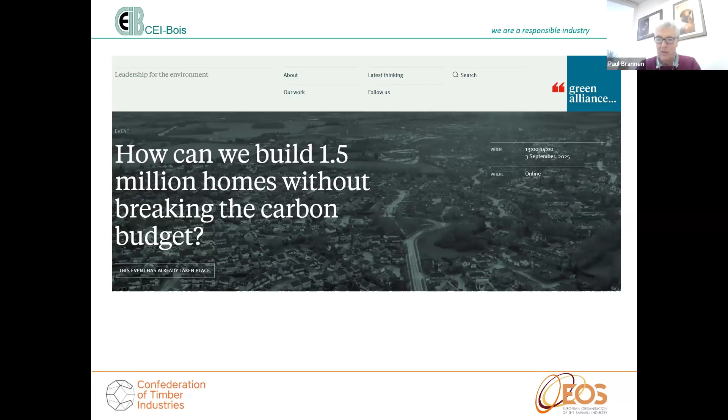We were at the Labour Party conference the other week, and it's fair to say our fears were not really mitigated from the conversations we had. We had a fringe meeting with the Labour Housing Group, and there does seem to be a disconnect at the heart of government in relation to the climate impact of building a large number of homes.

We're obviously making an argument from the point of view of the Confederation of Timber Industries, but it was very much the argument of the book: by switching to nature-based materials more as and where appropriate in construction, with timber being the leading material we have the most experience with, there are three big opportunities in relation to the climate.

There's the sequestration that trees do in the forest. There's a chapter in the book about European forestry, where the timber comes from. People will be aware that we import 80% of our timber, Sweden being the biggest single supplier. We grow very little of our own, but where the trees are growing, the carbon is being sequestered from the atmosphere, and that's step one down the road of benefit in relation to climate.

Then two big benefits come out. There's a substitution effect when you use wood instead of brick and block or concrete or steel. And there's also a storage opportunity, in that the materials we're using can store carbon.

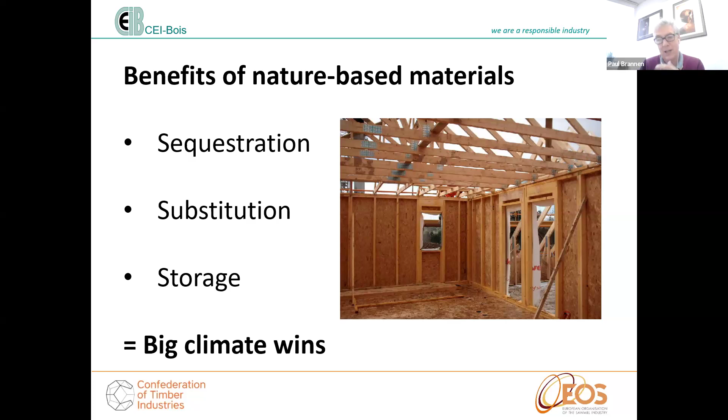So getting people to think through the substitution and the storage in relation to insulation, as well as the other materials, I think is really quite important.

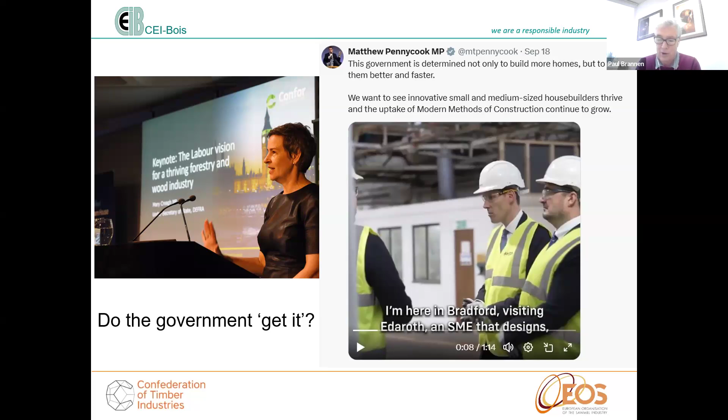As regards the government, we're fairly certain that Mary Creagh, who is the Minister for Nature and has responsibility for forestry in the UK, gets it from our various encounters with her as representatives of the timber industry. She understands. We're not so sure about Matthew Pennycook, who is the lead housing minister. Here he is on a visit just recently to a modular homes factory using steel for the frames. Could be using timber, but they're using steel. We're not sure that Matthew gets it, and part of our job is to try and get that message through.

The government did produce the Timber in Construction Roadmap back in March of this year. This began life under the previous government, so we're not entirely sure of the level of ownership under the Labour government from the previous Conservative government. But nonetheless, it was published. Mary Creagh, as the minister, launched it, and it does have the government stamp of approval for an increased use of timber in construction, and within that, an increased use of homegrown timber in construction. So that's a pretty piece of good news.

And this is what Mary Creagh says in the introduction, which is, I'm sure, maybe written for her by a civil servant, but it's got her name on it. We're fairly certain from the conversations we've had that she gets it, that using wood in construction is one way of driving down carbon emissions.

We've lost Angela Rayner, and it remains to be seen with Steve Reed coming in whether there's any particular change. But it was nice to see this in the Telegraph at the time of the launch of the document.

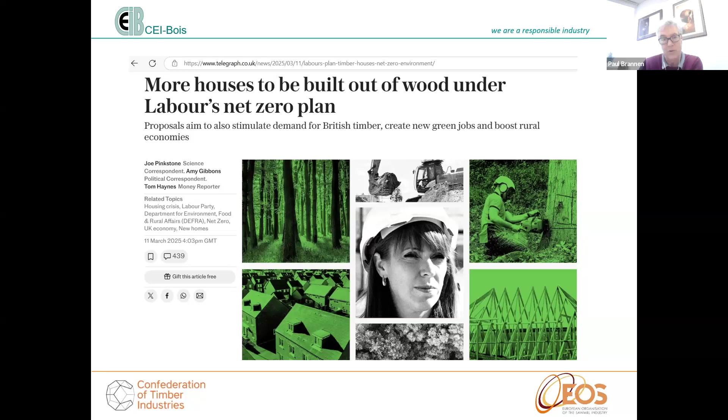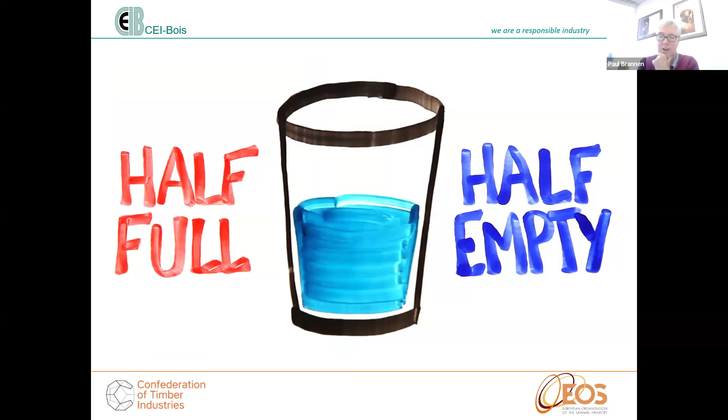And Baroness Taylor, who is in the House of Lords and part of the housing team, she has subsequently visited. So we have a minister in the Lords from the housing team who has certainly been introduced to some of these key issues. So our view as regards the government at the moment is it's a bit of a half full, half empty situation, certainly plenty to go at.

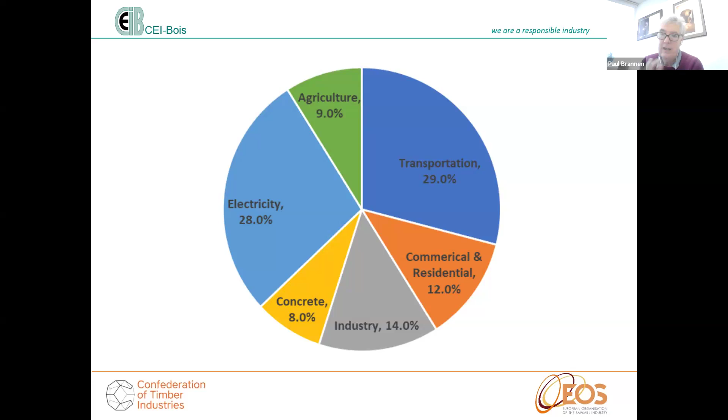Just a reminder, I'm sure everyone on the call is aware that concrete is responsible at a global level for 8% of global carbon emissions. It's a staggering figure, greater than the emissions of the whole of the European Union annually, which is 7.8% or something. So concrete is and remains a major issue, and I'd refer people back to this article that was in The Guardian in 2019 for a really good encapsulation of just how bad it is.

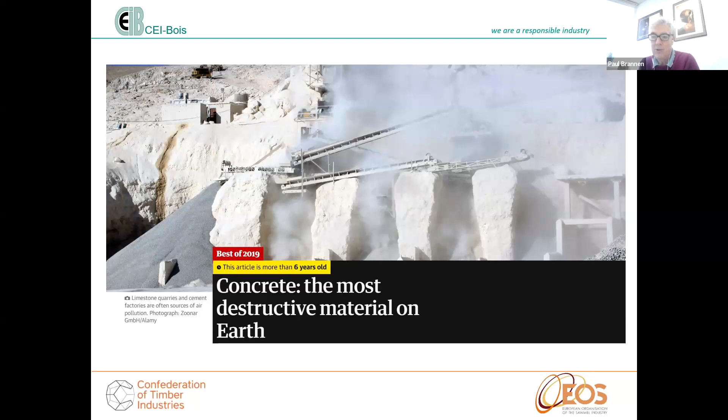That said, a building like the Paradise Building, beautiful timber building that it is, has concrete foundations. Those foundations are smaller than they would have been if the building had all been built from concrete and steel, because the timber is lighter, so the foundations don't need to be quite so big. But there is still a place in the palette of materials we're going to be using, whether for bigger buildings or smaller buildings, for concrete.

So they're certainly thinking about it. And in the UK, people may be aware there's a Part Z campaign to get the building regulations changed so that when you set about designing a building and putting in for planning permission, you should have to, by law, work out how much embodied carbon is going to be in the build. At the first stage there wouldn't be any limit. We wouldn't be saying you can't have above a certain level, but obviously this paves the way for that then being what happens in future.

So to begin with, you have to work it out in advance. You have to submit it as part of the planning process. Doesn't matter how big it is, it wouldn't necessarily make a difference, although hopefully people would say, does it really need to be this big? And then over time, it gives the government the opportunity to start to tighten it up and say, from 5 years on, you're not going to be able to build above a certain level of embodied carbon per square meter of the build.

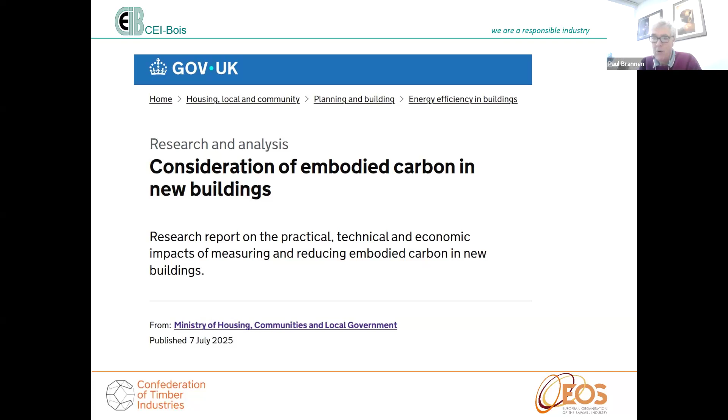And that's how the process would work. The government are thinking about it. This was a piece of external research commissioned by the British government, now up on their website. So this is the direction of travel. The argument would be from a climate point of view, it's just simply too slow and should have already happened. But tomorrow would be better than not at all.

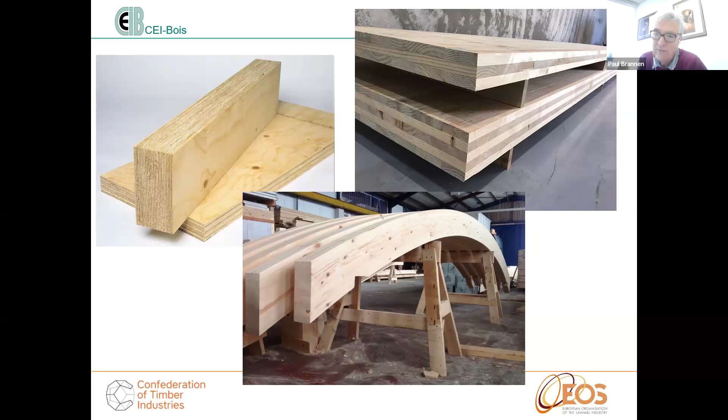One of the chapters in the book was to get across to people that we do have these structural materials now. And I still think people are surprised by this, that we have structural timber materials which have the same strength as concrete and steel. People do a kind of double take still when you say that, and you need to point out, yep, that's true.

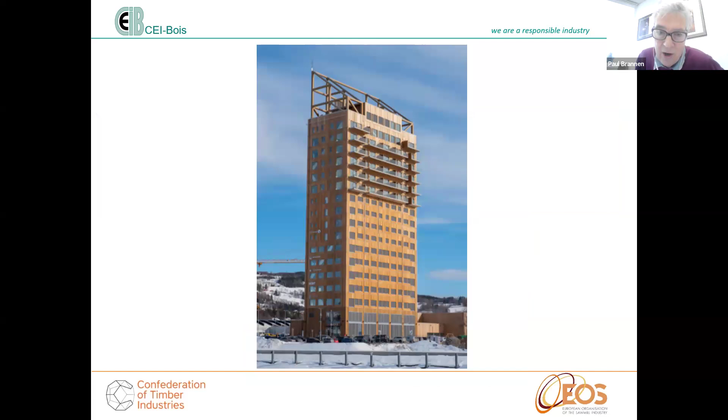And as a result, you can build an exceedingly tall building. This is the tallest timber building in the world at the moment, at 18 stories, in Norway. Just as an aside, because as we know, often people ask about timber and fire—in the middle of this building, across 2 floors, are the offices of Norway's largest insurance company.

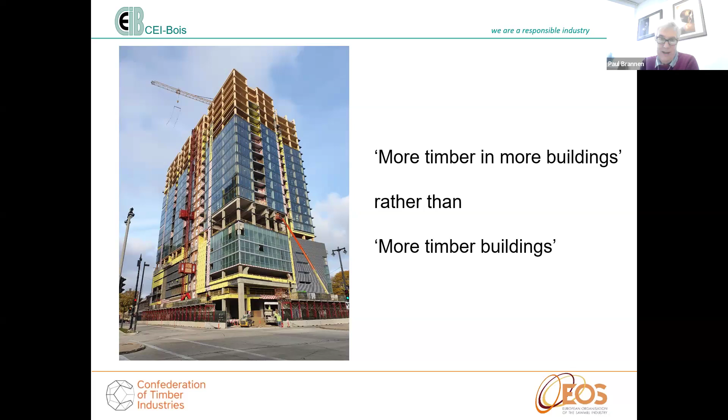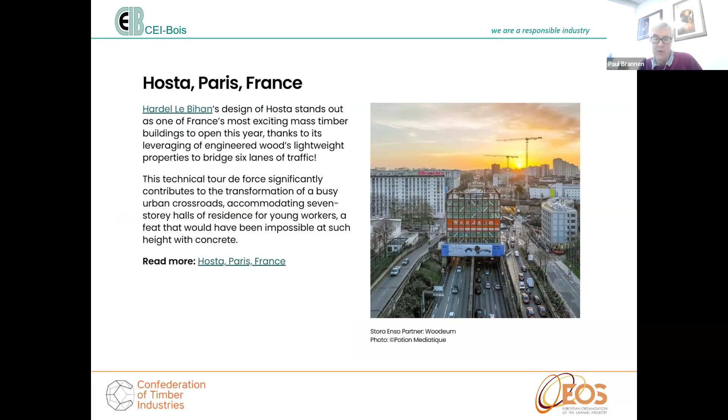And this is an interesting point—people may be aware that more than 90% of family homes built in Scotland are timber frame. More than 90%, 92% I think is the latest figure, of family homes built in Scotland have a timber frame. You wouldn't know it, because if you go to Scotland it's all been encapsulated. You go into one of these houses, plasterboard over the walls, no sign of any timber. And on the outside it's got a brick or some other form of rendering, so the timber disappears. So even people who live in timber framed houses in Scotland don't know they're in a timber framed house, and if you visited and went down the street, you wouldn't know.

And then you cross the border into England and it flips completely the other way. We're building very little timber frame in England at the moment, and it's 80% plus brick and block. However, it's changing.

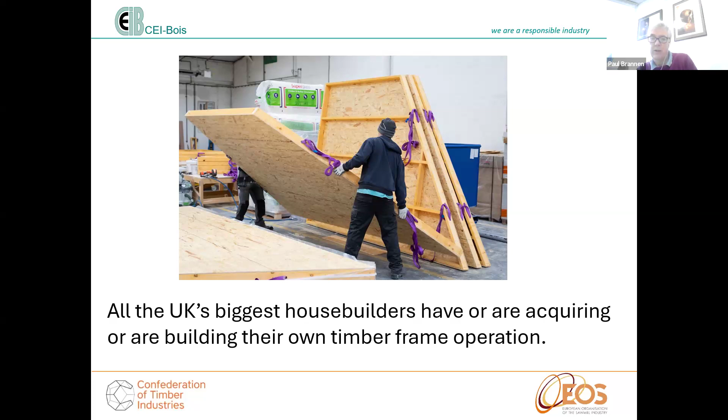But now there's an incentive to switch to timber frame. I think the other thing is the big house builders know that the regulations are heading towards us having to build with a lower carbon footprint. So there's a certain amount of competition to get ahead of the game.

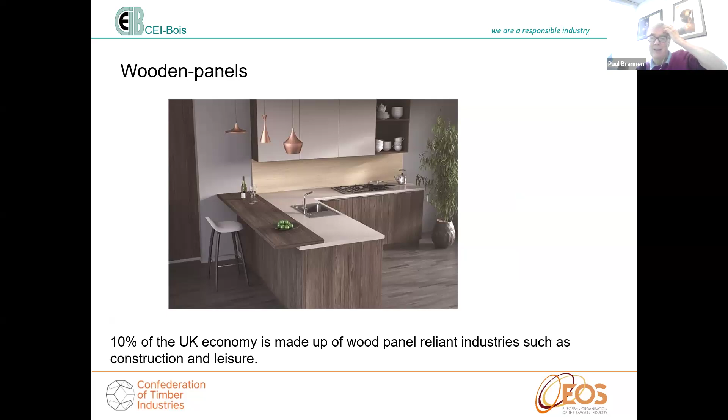And also, as well as the structure, people shouldn't forget there's a lot of wood in wood panels. So they're not structural as such, but it adds to the wood component in the building.

And then just a few words about carbon storage. I think people do realize that nature-based products like timber in the built environment store carbon, and that's a good thing. My belief is that there's a lack of understanding as to how big this carbon storage potential is. So people say, oh yeah, you can store carbon, that's a good thing.

There was this piece of research led by the architects DRMM earlier this year, and they looked at carbon storage as well as the health benefits of timber buildings. For the first time, they looked at 6 examples of mass timber builds in the UK, and one of the things they did was work out how much carbon is in each of them. They came up with a figure of just over 1,000 tons of stored carbon - there's a school, a railway station, some accommodation, a mosque. There was a mix of buildings with quite a variety of amounts of carbon, but it averaged 1,000.

And that was a figure which we've been able to use to start to make some calculations around how much carbon we could potentially store, and just to make a comparison about the sheer size of it - so people may remember...

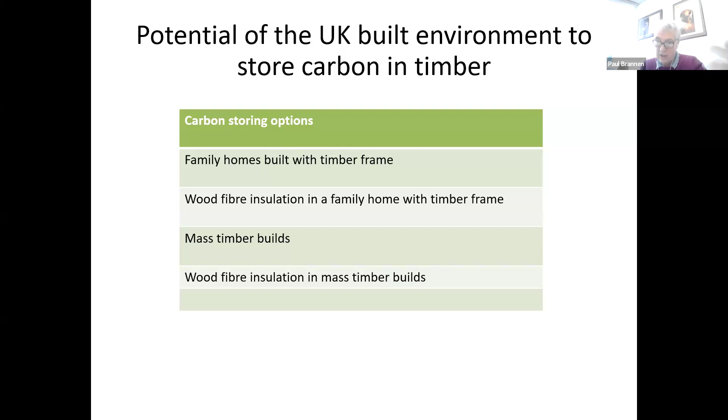And then look at the built environment. If we just take homes and bigger buildings, the carbon storage potential is in the frame, it's in the insulation - if you used a wood fiber insulation, that could be hemp. And then we've got mass timber buildings, these bigger buildings, they store carbon, and they too could use a nature-based insulation. So we started to crunch some figures.

One of the major house builders, who everyone's heard of but they don't want to actually put their name to this at the moment for some reason - I'm not quite sure why, because it's a good news story - their timber frame for their family house averages a storage capacity of 4.6 tons of carbon.

And then Steico, willing to go public, say well if you gave us that house and gave us the task of insulating it with wood fiber insulation, that would be another 3.5 tons. So you've got, in a family home built with a timber frame using wood fiber insulation, just over 8 tons of stored carbon.

And then you take the mass timber and the figure from the DRMM report, that gives you 1,000 tons. At this point in time, we have very little information about any mass timber building anywhere in the world being insulated with a nature-based insulation. They're all using fossil fuel-based insulations. So even these big, wonderful timber buildings going up in places like Oslo and Helsinki are using rock wool in the main.

And is that what Paradise used as well then? Do you know? Yes, yeah, it's not a nature-based insulation. However, what was the reason for that then? Well, I mean, this is kind of... it's the same.

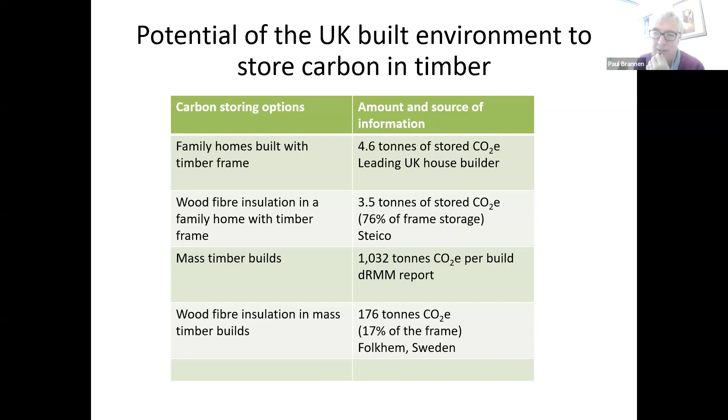And that's right. I think it's a case of a rising tide lifts all the boats. Yeah, it's beneficial basically all around. And then we took these figures and we started to drop them in.

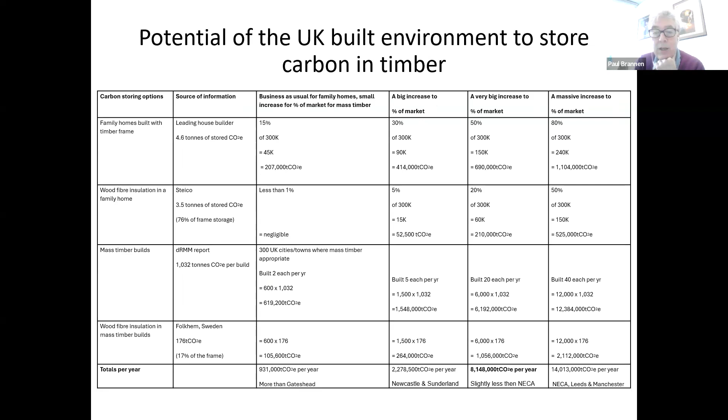Just from a time point of view, I'll go through to the column headed 'a very big increase to the market.' So if 50% of the 300,000 homes we intend to build a year had timber frames, that'd be 150,000, and that would give you 690,000 tons of stored carbon.

If 20% of those had wood fiber insulation, you'd get another 210,000. Now obviously people have different views on the figures, so it might be less than 50%, but more than 20% on the insulation.

And then for mass timber builds, the calculation was our cities and our largest towns, a group of 300. If they each built, in this case, 20 mass timber buildings a year, that's where you get the big delivery, say over 6 million tons of stored carbon there.

And if they in turn had nature-based insulation, that would be another 1 million tons. At that point you hit the 8.1 million, which is the equivalent of the carbon capture and storage under the North Sea.

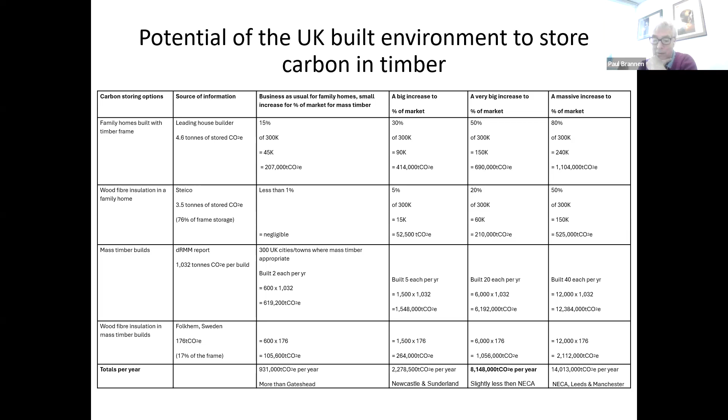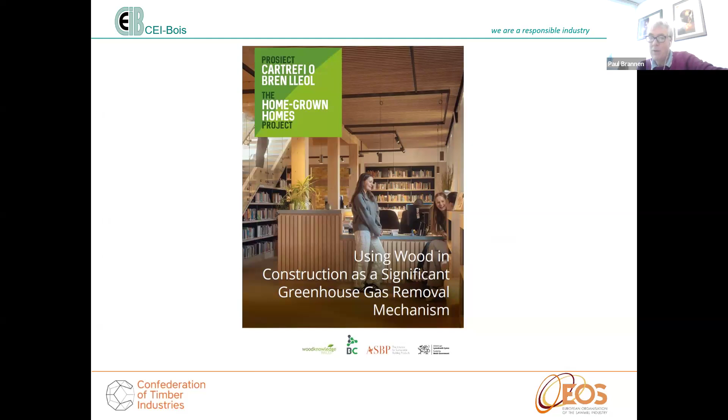So it was just to convey to people that using more timber, wood fiber, and other nature-based materials in the built environment can be a very significant carbon store, in keeping with industrial carbon capture and storage. It's not a small extra on top of the substitution, it's up there. And there was this report from Wood Knowledge Wales recently, basically pushing that message home: timber in the built environment is a greenhouse gas removal mechanism and should be recognized as such.

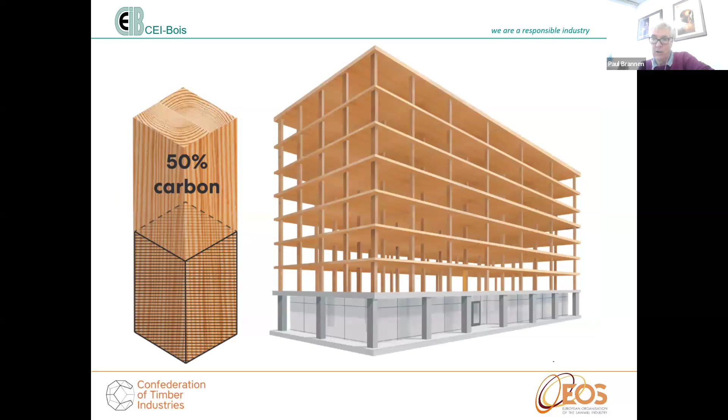And then there's this issue which has been lurking around for a while now, but is coming back up the agenda, partly because Grown in Britain are exploring an accreditation scheme for timber products in the built environment to potentially generate carbon credits. There's potentially a lot of carbon credits which could be sold off the back of timber in the built environment.

It's only happened once in the world so far, at the University of Washington two years ago, a new mass timber building called Founders Hall. They worked out how much timber was in it, which was 1,000 tons, and they monetized it, selling carbon credits for $150 for each ton of stored carbon. They were bought by benefactors of the university, who then gifted the credits back to the university, who used them to offset the carbon footprint of the university for that year.

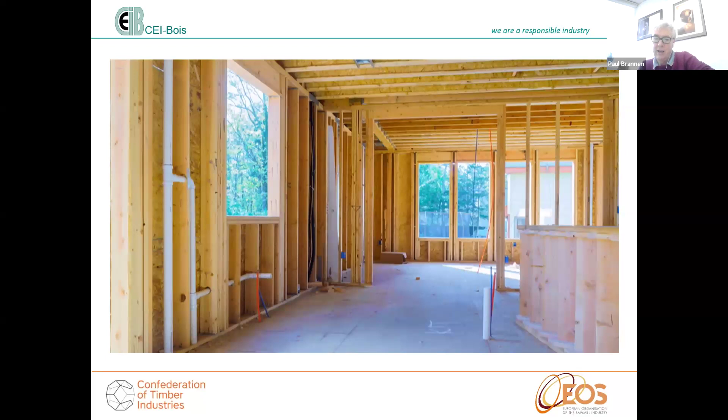It's the only time it's happened, but the sense is, at a European level certainly, that this is something that's coming. They have a carbon removal certification framework which is fairly advanced in its development at an EU level, and Grown in Britain are exploring something similar, a scheme which would fit within that EU framework for measuring stored carbon. So as well as building buildings like these with wood, we're also potentially generating another product for sale, which is the carbon credits. So I'll end there.